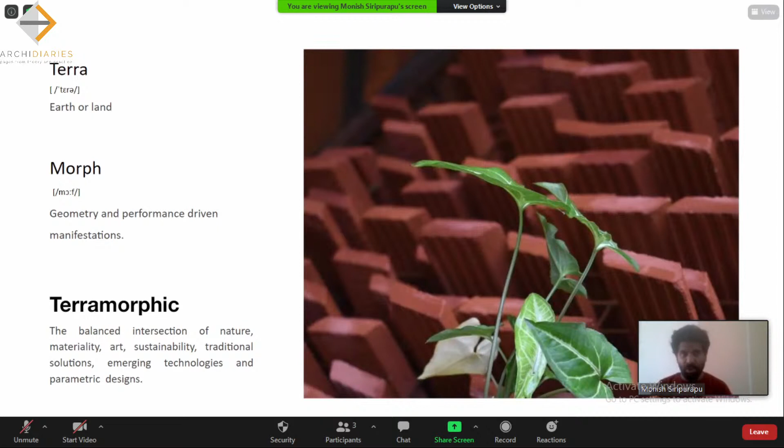One is geometrical exploration, wherein we try to see how we can bring a very simple material like terracotta using parametric forms, software, and tools, and adapt it in our projects. The other is based on the performance of the material itself, how we can use it for both heat reduction and cooling, so how the material inherently helps in making that possible.

So we are a studio based out of Delhi, and we are a group of architects, engineers, designers. We have artists, people from all diverse backgrounds working together in making this possible.

Before actually talking about terracotta, I would like to go through a few of the projects I have worked on in the past, just to give an idea of the kind of work that we do. I won't be talking much about these projects at all—this is just a glimpse into the work of the studio.

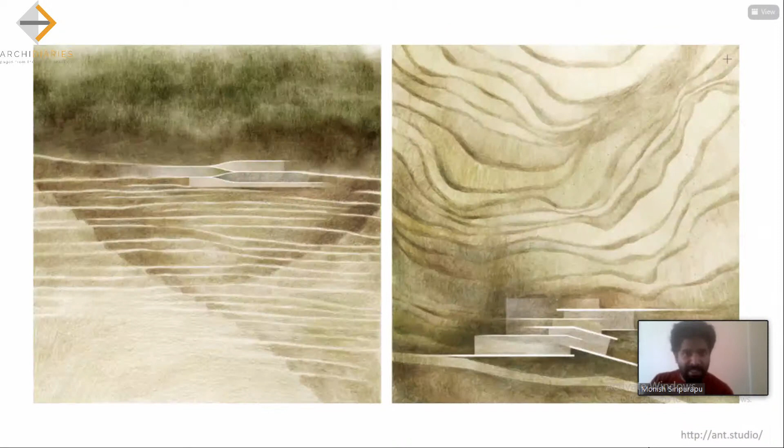So there's a project in the hills, wherein we try to merge the building with the surrounding landscape so that it feels like one with the terrain. This is somewhere in Nainital, and it faces the Himalayas beautifully. The idea is how we can merge it with the terraces that are already there.

And there's a project proposal in Kerala. It's in the middle of a forest, so we wanted the building structure to be inspired by the trees, as if the building is floating in the forest.

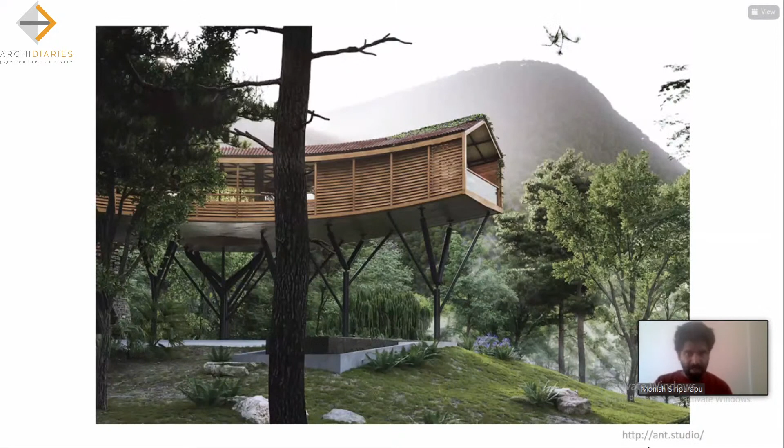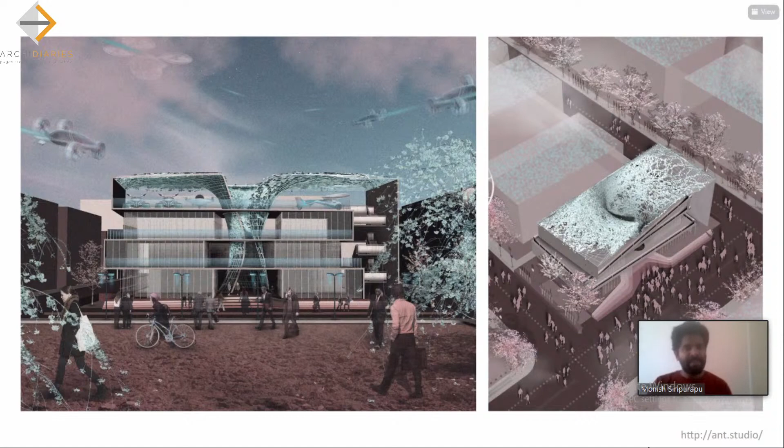Some of the projects, like this one, we wanted to combine a form that is actually modern and also bring nature into it. This was a proposal for a commercial project in Raipur, which did not materialize, but nevertheless, I think it's one of the projects we really thoroughly enjoyed working on.

So the first set of works I will be talking about today is our explorations with brick—something we really enjoy doing. In practice, when we started off with parametric design and all of that, one thing we always wanted to do is play with a simple module like brick, using tools like Grasshopper and Rhino, to create these patterns and forms.

And how do we actually make it possible in the real construction? So these are some of the older explorations wherein we tried actually breaking the stereotypical way of looking at the boundary walls and stuff.

Wanted to use doubly curved walls with exposed brick, and like I said, playing with simple tools in the software to get the doubly curved, which is otherwise very difficult to get when you're actually using just manual tools.

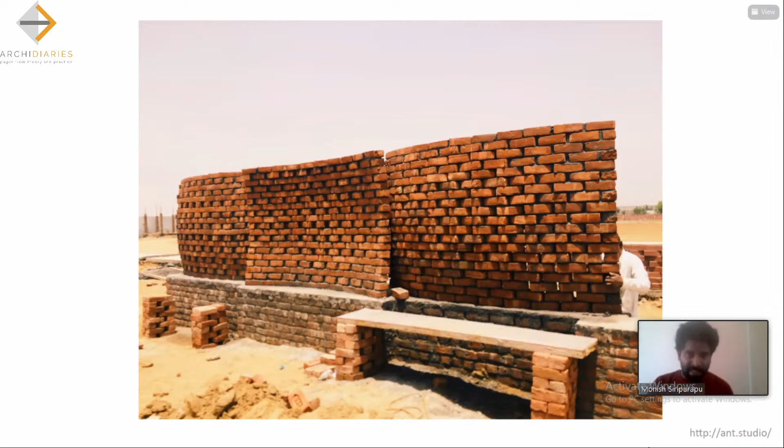So for a boundary wall, you can see that the brick pattern towards the center is way more playful, and as it goes towards the edges, it becomes almost flat. The angle and everything changes. So every angle in this brick wall is totally different, and also every layer is different from each other.

So these are some of the images. And again, we try to play with this brick wherever it's possible, because it's super modular, and when you actually put it together, there are millions of possibilities. It also creates a beautiful warmth in spaces that is really nice to experience.

So this is a project in Raipur, an entrance for a housing project, wherein we wanted to break the stereotypical notion of having this huge guardhouse at the entrance to the gateway, and having these metal structures on top.

We said, okay, why not actually try something more open, wherein the wall plays with the scale. So this is 6 meters in height.

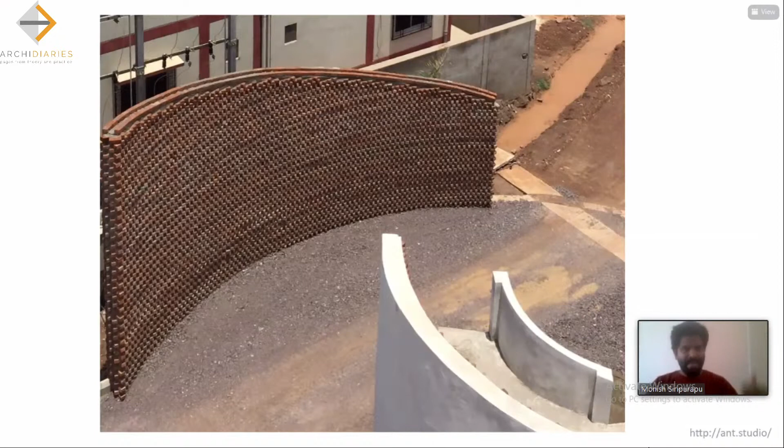And again playing with this thing, these are some of the images from the construction, wherein the wall actually gives that scale when somebody is entering into the project.

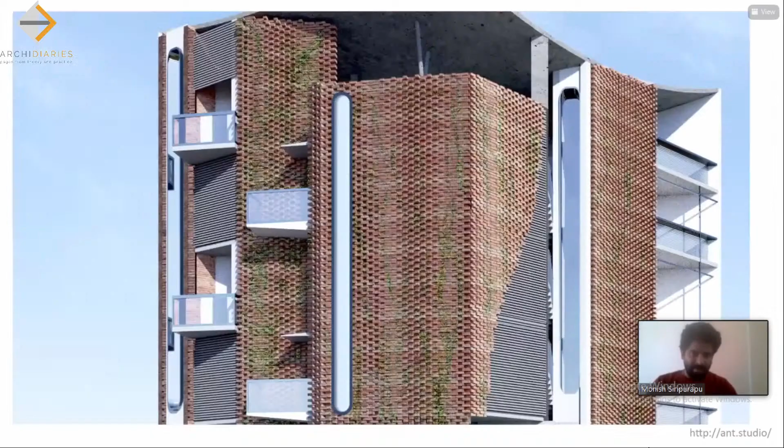We always do a lot of these exposed brick walls and buildings. But here we're also trying to see if we can get this kind of play in the elevation and facade, where you can integrate it with vertical greens, because they provide a lot of surface area for the greens to grow. So why not actually even try those things?

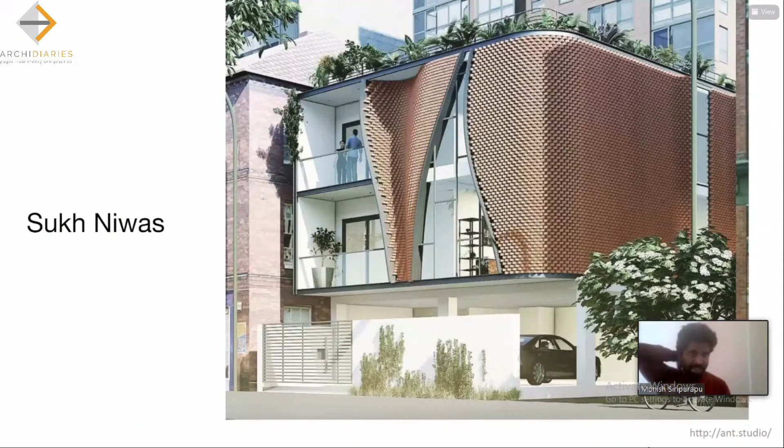So this is the latest project that we have proposed for our residence in Gurgaon, wherein we wanted to integrate. There is this project where one side is open and the other side there's a housing project, so we cannot have a lot of windows, even though there are a couple of windows here which are not visible in this render. We can see it in the next one.

So we wanted to make the whole facade a bit more playful and also sculptural, like an installation. And then the form can look actually really simple and minimal for a G+2 building, and have the material do the talk.

The idea was also how can we bring artistic elements into the building, the skins and the facades, with just simple materials but complex tools. So this is another angle wherein you can see that the way the angle opens forms a nice edging to the windows and stuff.

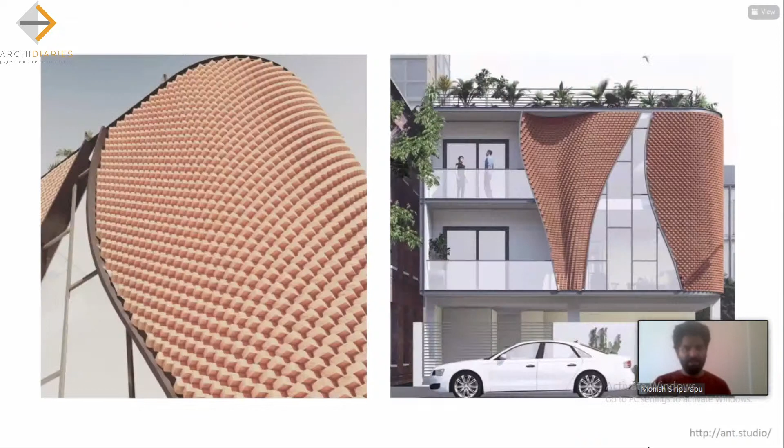The way the brick bond and everything is done with the curvature, it blends beautifully, creating an organic texture that can help bring beautiful shadows that highlight the building, so that the elevations don't look flat, and these really help in elevating the form and how it is visible.

So some of the previous project exploration, for a factory, we had to design something in a setback. It's actually just 10 feet wide. They wanted to create a small semi-open cafeteria, and wanted to do something so that this actually becomes like a place for having a cup of tea and so on.

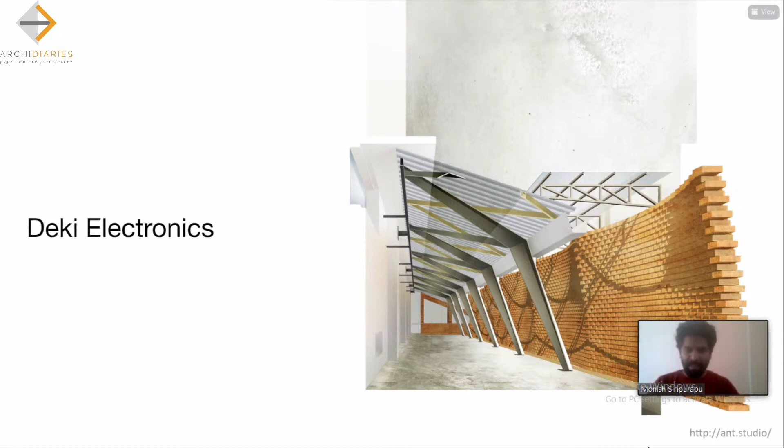So we said, okay, because it's a setback and there is only one wall left for us to do something with, we decided to play with it and bring light from a skylight sort of thing on the top that beautifully lights up the wall on the right hand side. And so this is how it looks at completion.

So this, being a factory, we wanted it to be really warm and completely low on maintenance. Even if you go here, it was done like 5-6 years ago, the experience remains the same because this material needs very little maintenance, and it's easy. For a very stressful environment like a factory, this adds a lot of warmth and character in the space.

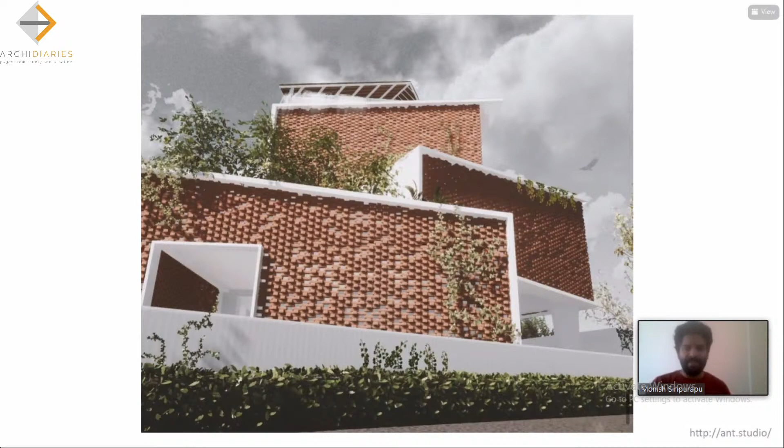Now, some of the latest projects under construction right now, this is a project wherein we are trying to blend this material, brick, with other forms so that it's not completely an exposed brick building. The idea is that you blend it in a manner, like I showed in the previous pages, so that it becomes a very integral part, not just a completely exposed brick building wherein the whole building bleeds brick, but have it in a curated manner so we're able to play with the textures, the jalis, and different patterns, and ultimately the textures that come out of the project.

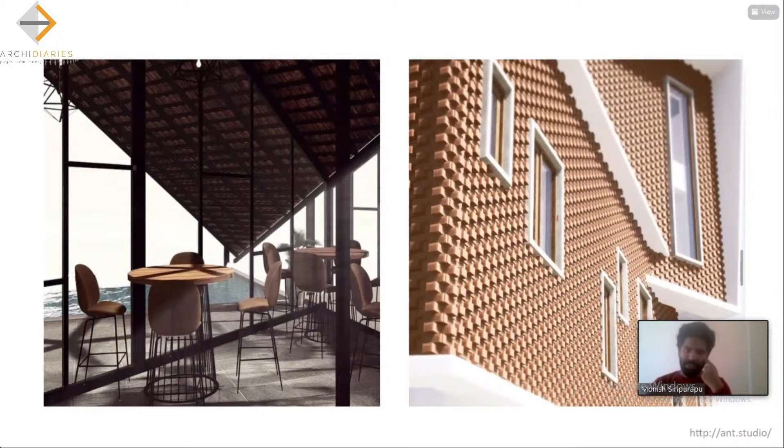So this is underway. We started with the cladding, the structure is almost complete. This project is again like 90% complete, and we're just in the finishing stages right now. It's a project in Gurgaon, and here it's a kind of modern building, and we wanted the textures to be very parametric.

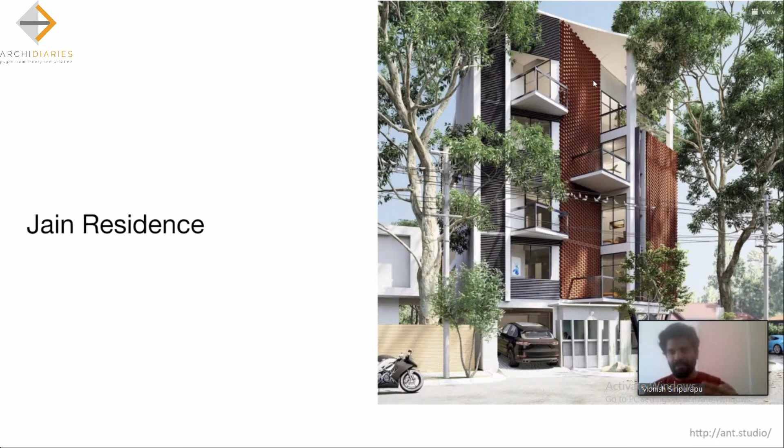So if you look at it, the textures from bottom to top - the render isn't that clear, but the bricks slowly, from being a flat wall, start to come out, creating a texture on the top and all, and even on the right hand side, these textures, this is like a wave. I think this is way more visible on site than actually looking at these images on the renders.

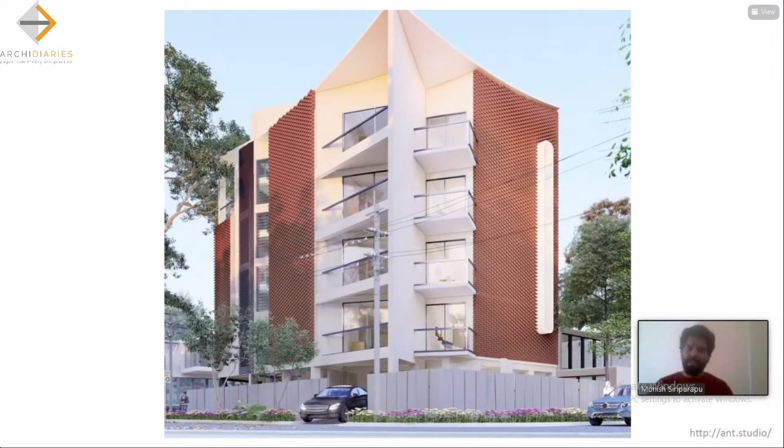So even here, this is for the same project, the rear elevations, wherein you can see there's a window and then the brick wall is actually coming as if they're trying to hug the window, that's the vertical element that is there.

So apart from brick, terracotta as a material is nothing but fired, baked clay. One of the beautiful properties of terracotta is that if you use it in the right manner, it can cut off the heat that's coming in, but then there's this porosity that also helps in creating this capillary action when you want to use it for other performative purposes.

So our love affair with terracotta, or brick, is not limited to just the material restricted to brick. We thought we'd explore other materials and other forms of terracotta. So the installation I'm going to show you right now involves terracotta and other things we've taken and turned into, manifested into, some kind of art forms or elements in buildings.

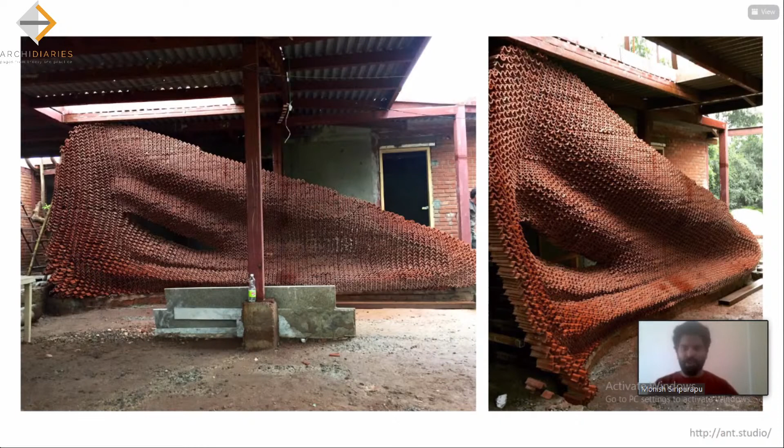So these are tiles - we've taken these recycled tiles from a project, this Anahat project that's happening in Noida right now. The roof that was brought down, we utilized the same tiles and turned it into an installation. So instead of throwing these tiles into the landfill or something, we thought why not repurpose them and make an art feature or a wall out of it within the living room.

So the form was completely visualized and developed through Rhino and Grasshopper tools. If you notice the structure, the most challenging part is having this kind of an eye and cave sort of thing in the middle. And these modules are all the same, with maybe a tolerance of 3 to 4 millimeters. So the challenge for us was to create this so that they're interlocking and the structure is stable and so on and so forth.

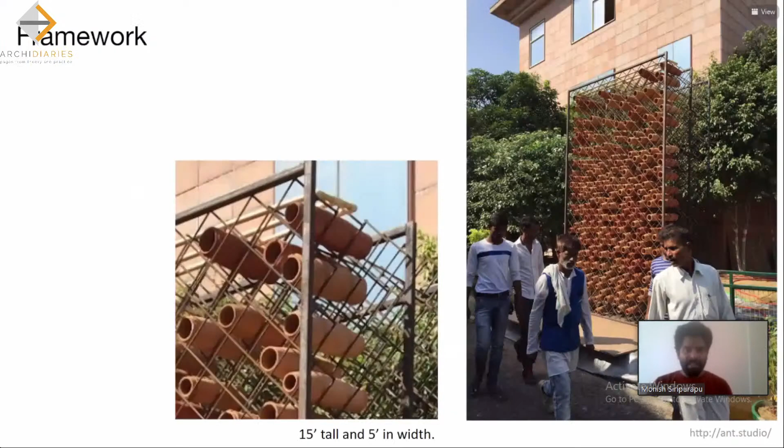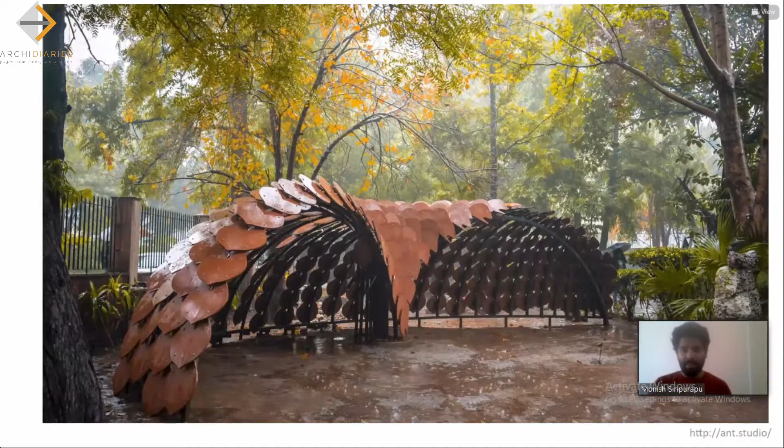So now moving forward, we have done some other installations. When wanting to use this material, we wanted to show it as a very contemporary thing, not just something sustainable and earthy. We thought, why not push this material so it looks both eco-friendly, but also when it comes to form, represents something very state of the art. The form could still look very contemporary with the kind of designs we do.

So this was a pavilion inspired by Pangolin for a workshop we did at SPA. The idea behind that is what if the installation can both be a functional thing, like shading for people to sit and enjoy, but also talk about a creature like pangolin, which is one of the most endangered species. So if we can both create awareness through our installation and at the same time talk about a social issue through art.

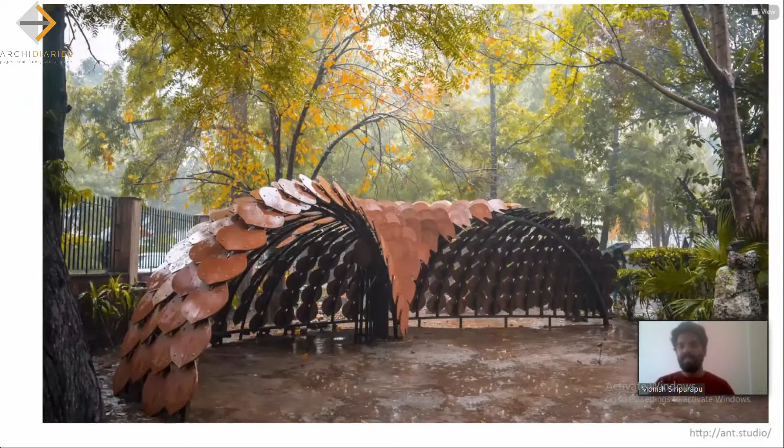So that is some of the exploration. Most of the stuff you saw so far has to do with form and geometry using tools. It's more of an expression. The works I'll be showing you from now on are more about how we can readapt some of the traditional techniques that exist, using terracotta for a more functional purpose.

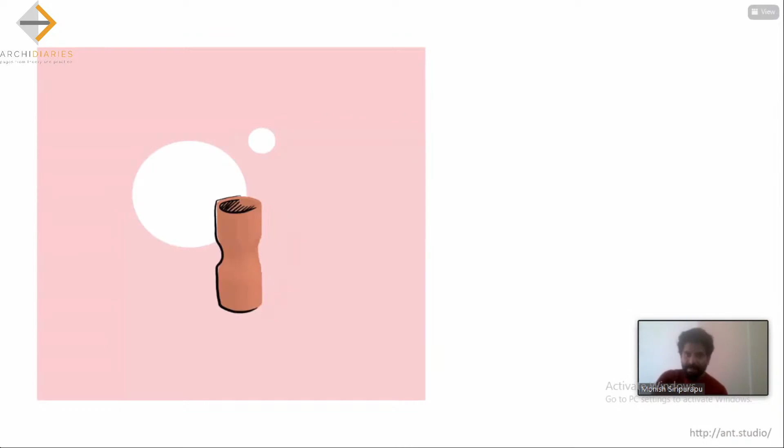So that's how we started, and then we realized that if we were able to do that, there's something we can redefine in the way jalis are looked at today. Because as you guys know, the buildings industry contributes to 40% of the emissions globally, and the building industry contributes to 40% of the energy consumption, especially for cooling.

So I think this is something everybody is aware of: the harmful impacts of air conditioners and the emissions, and so on, like the impact it has on the heat island effects in the cities.

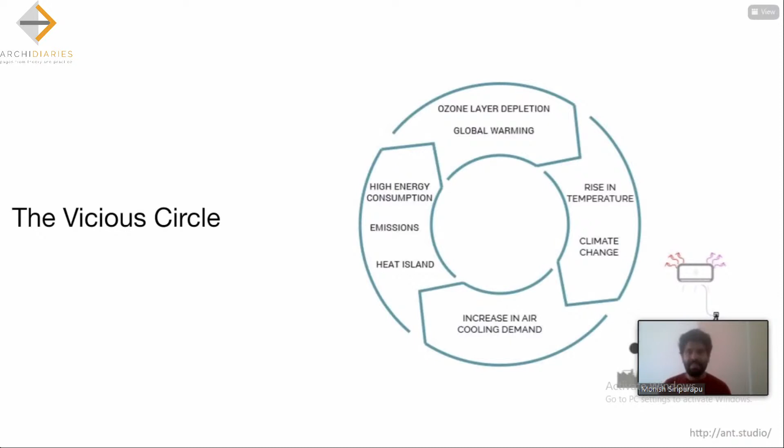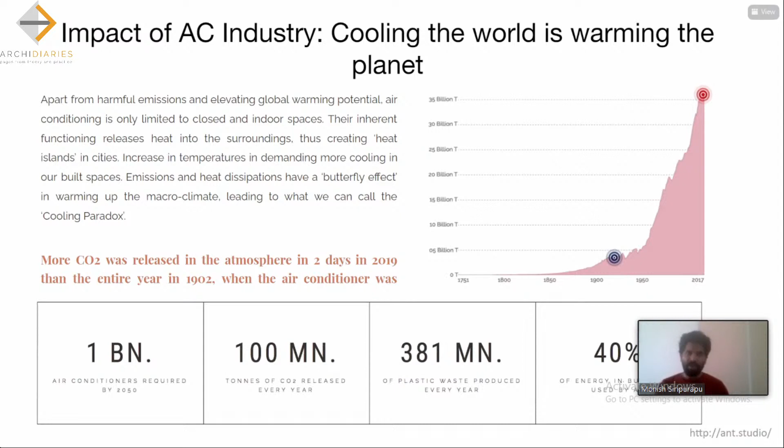So we started looking at how we can probably try to redefine passive cooling techniques, not entirely passive, but getting inspiration from passive techniques, so that we can enhance cooling through natural ventilation in our buildings. How we can enhance that aspect so that our dependency on active cooling, more energy intensive cooling, can reduce. So the idea is not to replace air conditioners in the industry, but how can we reduce the dependency on them.

If you look at it, India is one of the countries pushing for this serious cause, coming up with a cooling action plan wherein they are pushing for passive cooling or hybrid cooling solutions, so that our energy consumption in the industry can reduce. So what is the solution? That's the most important thought or idea that we were chasing.

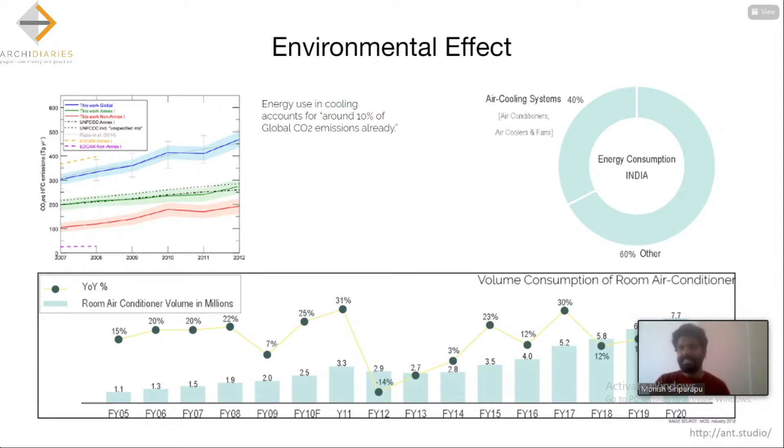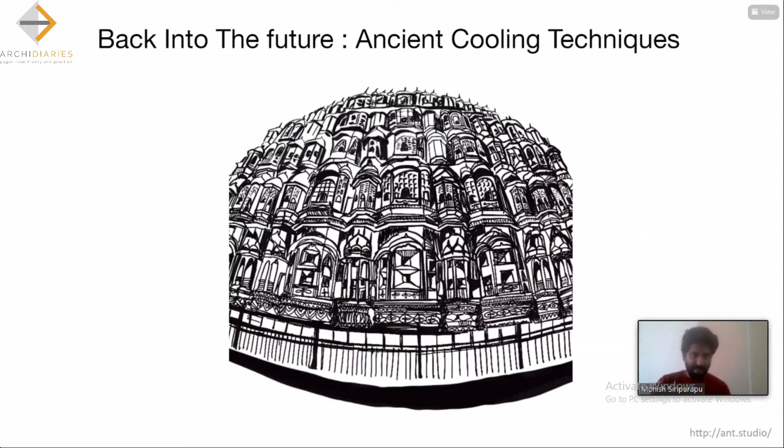There are thousands of beautiful examples where people are utilizing these passive techniques that have worked in the past, in a traditional manner. So our objective is how can we bring that and combine it with research and technology so that we can make it better. Our idea is to go for something very simple, what we call a beehive, because the shape of it is inspired by a beehive.

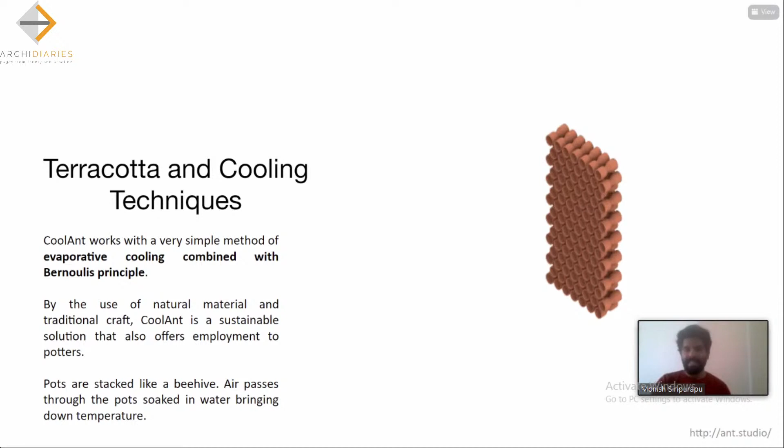This is just stacking a series of pots and pouring water on top. As the air passes through this and comes out, it is naturally cooled. The form is inspired by how bees stack the cells in a hive, and the same way the form is done using terracotta pots. It's a very simple technique: the air passes through it when the pots are wet, and naturally when it comes out, it's cooler. So these are the pots.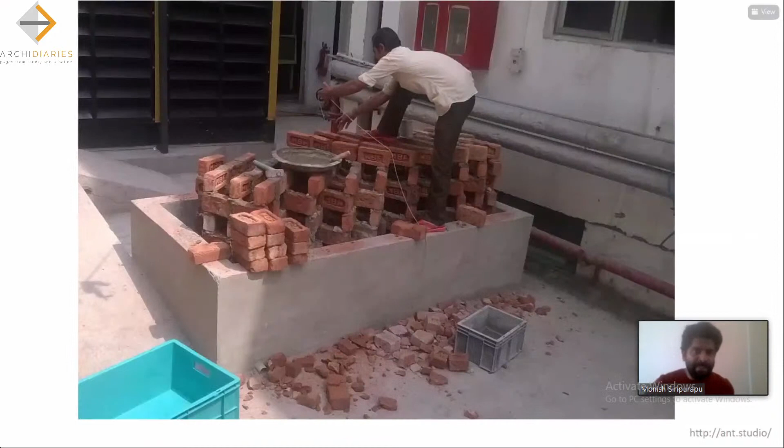This exploration first started by creating a brick installation prior to this. We did it because when we started off, it was just an idea, so we wanted to validate this. This was the first prototype we did 5-6 years ago, where we made a brick lattice structure in front of the DG set, and let the air pass through this installation, and saw that there is a substantial drop in temperature. So we went back to the drawing board.

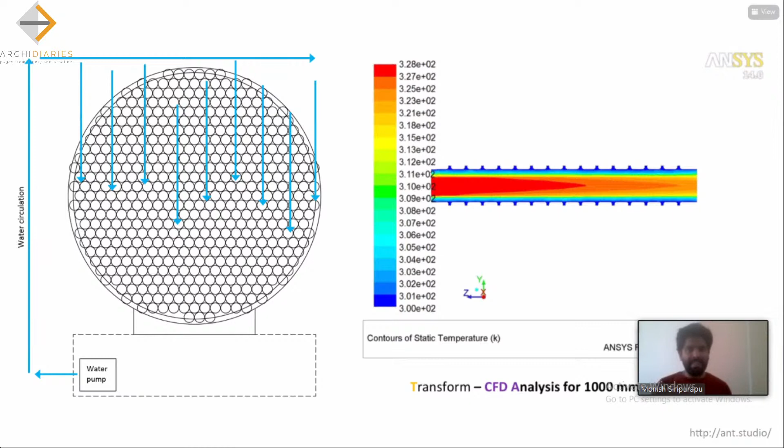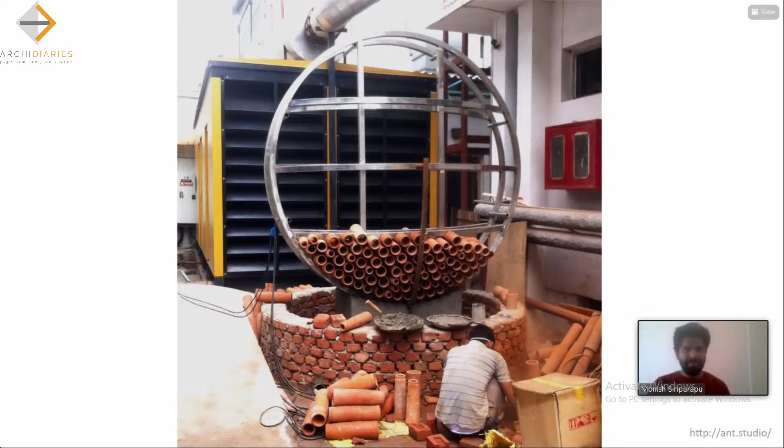We wanted to combine it with, instead of just assuming the facts, actually take help from a technical expert to do analysis, so we can see if there is some kind of logic to the technique, and so we can predict the size, the diameters, and the length of the pots and so on. So this was some of the measures after the prototype in front of the DG set. And yeah, this is how it looks after the water and all.

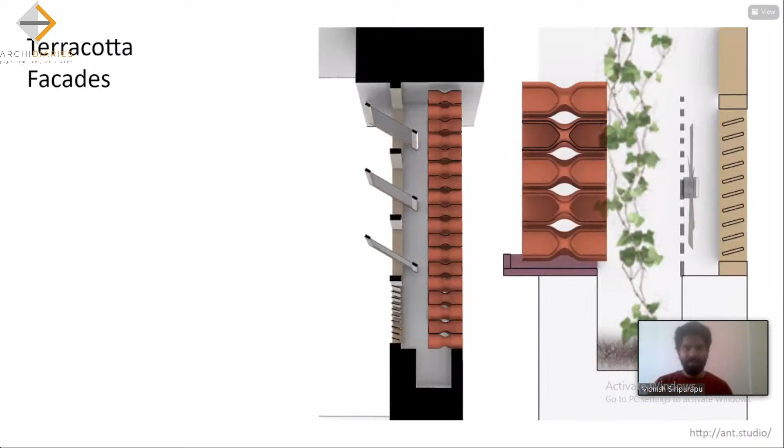So we started more and more explorations, trying to get craftsmen involved, making it more fun, applying it to building facades and so on. We are trying to adapt it in different places and in different ways so that it can be modernized and fit into even a very contemporary urban setting without much hassle. We saw another project in Sundarnagar, and then for a school we tried to implement it in a window. This is an experiment again, and so on.

Are there any questions? Should I pause, is it going too fast? You're on mute. Now, am I audible? Yes, yes, yes. I think you can take your time. I'm just asking because should I pause to get some questions, or should I continue? No, I think you can take your time, finish the presentation.

Okay, so this is the last segment of the presentation: bioreceptivity. This is more of an observation that we came across when working with the material. Most of the questions people ask when we do this installation are, what happens when there is some kind of moss that grows on it? So what do you do? Because terracotta and water, when they come together, moss is a byproduct. That's the most beautiful thing. Some people like it, some people do not, and there are mixed feelings about it.

In the earlier stages of this installation, we still suggest the same thing to people: those who do not like this can just put a few drops of chlorine in the water every fortnight, and there won't be any moss growing on these installations. But if you like moss, the possibility is that you can combine it into something even more beautiful. By combining terracotta and amplifying the growth of moss, you can even turn it into a vertical garden with zero plastic. These are some of the prototypes we have done earlier, just to show how that is possible and how we can combine plants inside this.

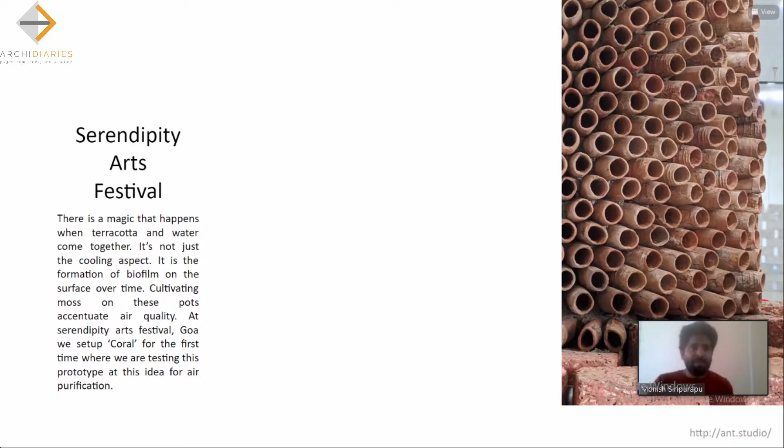And since the water is not naturally falling on it, it can facilitate growth on the product. So another installation wherein we thought of using it, that triggered an idea for us. What if we can, and moss can actually sequester carbon dioxide five times its weight.

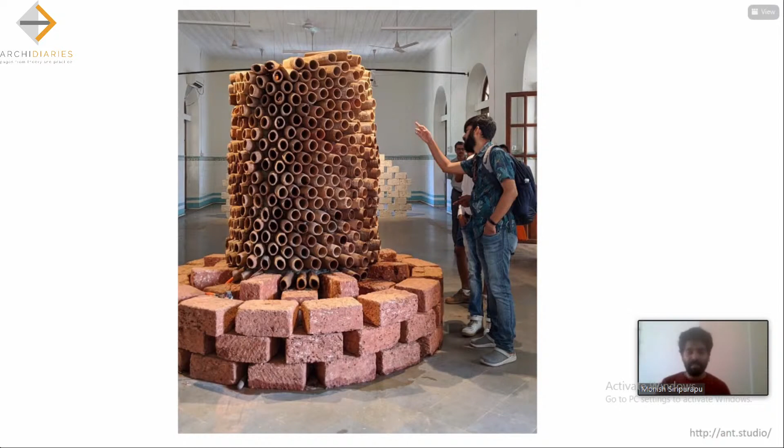So we thought, why not create these public installations that can help both in cooling and purifying the air around, to an extent. These are some of the research projects we are still doing, pushing for this idea that the combination of moss and terracotta together can solve the cooling aspect, enhance air quality, and most importantly become public art installations in the city, places that can be both beautiful and functional.

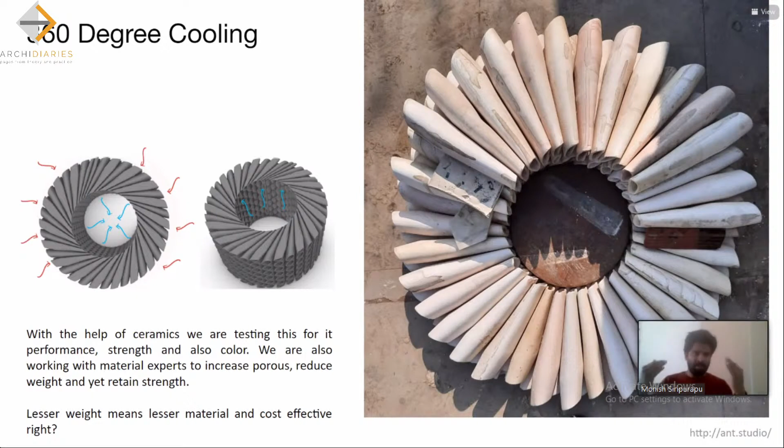So this is how it works. It sucks the air readily into the system, and then it releases the air, and the air when it enters wide aperture to narrow aperture, there's a pressure difference that it creates that also helps in cooling. And in the center there is a system like an air washer that can further do this.

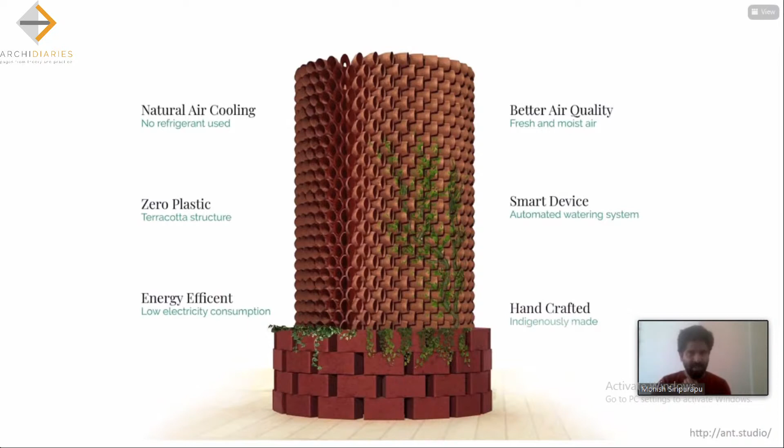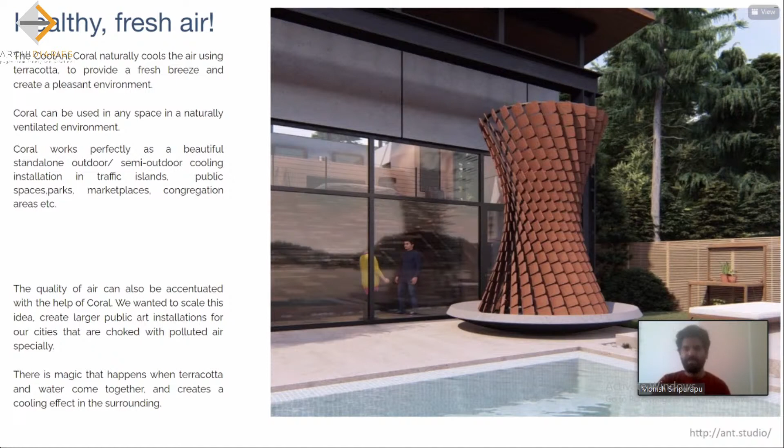So this is how we are planning to do the cooling systems for public spaces. This is a proposal we are currently pushing for, again a development of the previous installation, a much larger thing wherein this can become terracotta-made, modular, so that they can become like towers in the city, like bio towers. It's a conceptual proposal wherein we are saying these things can actually be both artistic and also try to reduce the pollutant particles in the environment around.

But yeah, so that's how it looks. So that's more or less the kind of exploration that we are doing right now in our studio.

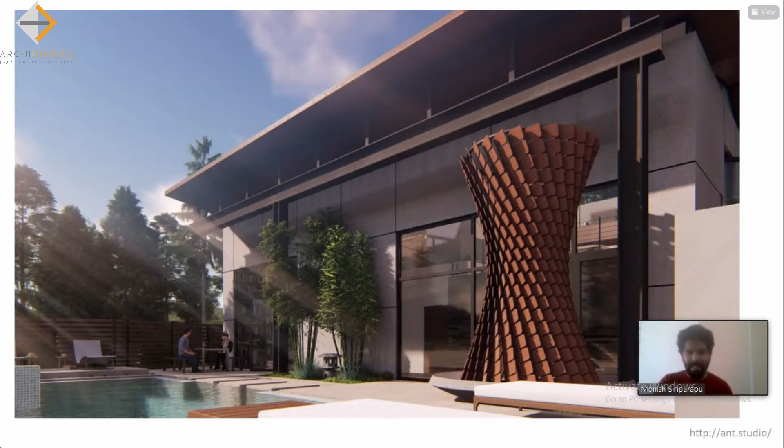So I mean, the whole idea is that as a practice, what we really enjoy doing is combining the technology aspect in things and further helping aid us in research, not just for form explorations, but also something that can probably solve a social problem or an issue with our own capacity. And I really look forward to taking any questions that you guys might have.